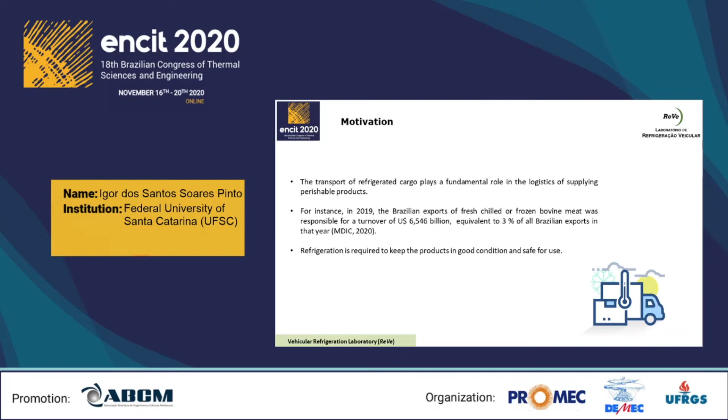The transport of refrigerated cargo plays a fundamental role in the supply of perishable food, allowing the maintenance of these products in good condition and safe for consumption until their arrival at their destination. In 2019, Brazilian exports of chilled and frozen bovine meat were responsible for a turnover of $6.5 billion, equivalent to 3% of the national exports. Through this information, we can note the great demand and the importance of transporting perishable cargo in the country.

Some papers address important topics related to refrigerated cargo transport. Tso et al. evaluated the effects of heat and mass transfer on the energy consumption of refrigerated trucks. The authors found that the use of air curtains can generate energy savings up to 40%. Da Silva, Silva e Taglialenha developed a steady-state mathematical model to evaluate the energy consumption required to transport refrigerated products, considering geometric and operation parameters.

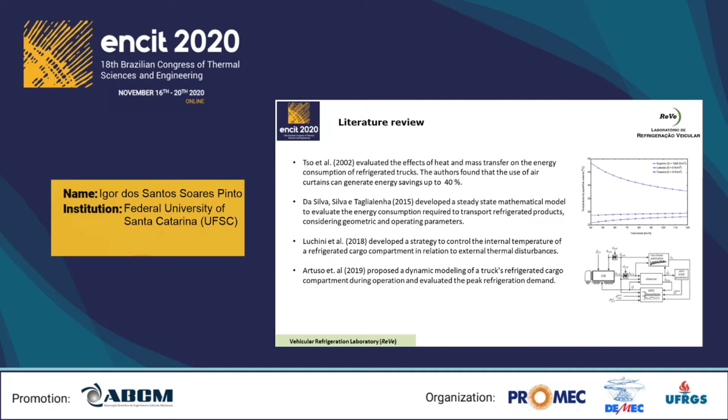Luchini et al. developed a strategy to control the internal temperature of a refrigerated cargo compartment in relation to external thermal disturbances. Artuso et al. proposed a dynamic modeling of a truck's refrigerated cargo compartment during operation and evaluation of the peak refrigeration demand.

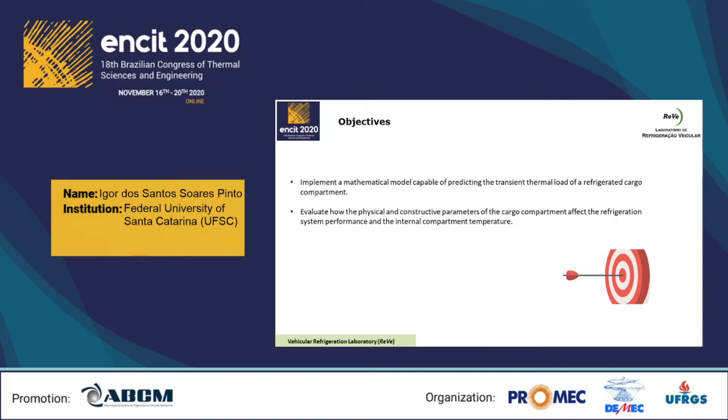This work has the following objectives: implement a mathematical model capable of predicting the transient thermal load of a refrigerated cargo compartment, and evaluate how the physical and constructive parameters of the cargo compartment affect the refrigeration system performance and the internal compartment temperature.

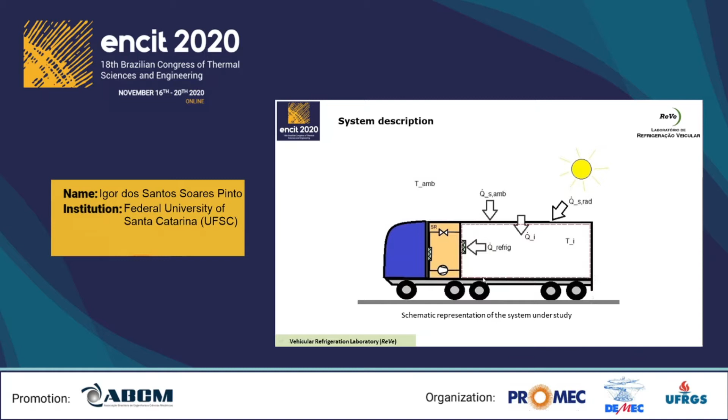A schematic of the studied system is shown in this image. In it, we have a truck equipped with a cargo compartment and a cooling system. The compartment interacts with two external heat sources defined as the thermal load due to the solar irradiation, Qs-rad, and the ambient thermal load, Qs-amb. While part of these parcels is accumulated on the compartment walls, the rest is infiltrated in its interior, this being Qi. In order to keep the internal temperature Ti within acceptable values, the infiltrated load must be removed by the refrigeration system, whose capacity is represented by Qi refrig.

The system was modeled based on the first law of thermodynamics and the fundamentals of heat transfer. Energy balances were applied on each face of the refrigerated compartment and in its interior. The solar position was considered, which continuously changed the thermal load Qs-rad along the path of the vehicle. The two main equations of the model are the following.

The first represents the derivative of the internal temperature with respect to time, which is equal to the infiltrated thermal load minus the cooling capacity, Qi refrig, divided by the sum of thermal capacities of the internal air and the products inside the compartment. The second equation is related to the derivative of the surface temperatures with respect to time, which is equal to Qs-rad, the thermal load due to the solar irradiation, plus Qs-amb, the ambient thermal load, minus the infiltrated thermal load, Qi, divided by MSCS, the thermal capacity of each surface element. Additional equations were used to evaluate this derivative.

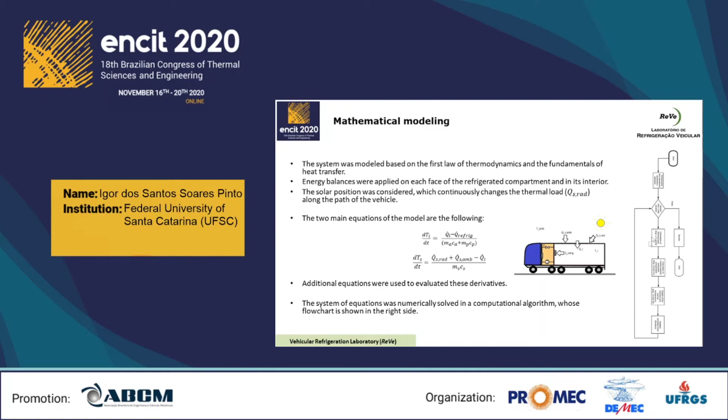The system of equations was numerically solved in a computational algorithm whose flowchart is shown on the right side of this image. The physical and constructive parameters investigated in this study were the following. In the table on the left, we can see the external dimensions of the compartment, and in the table on the right, the insulation thickness cases considered in this study. We have used 4 insulation thicknesses with the values of 50, 80, 100 and 120 millimeters.

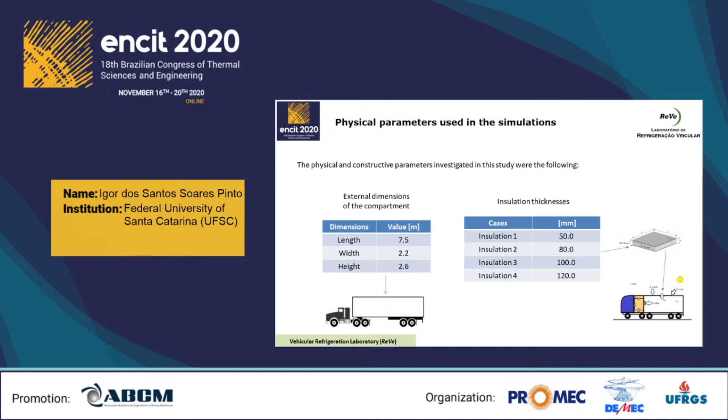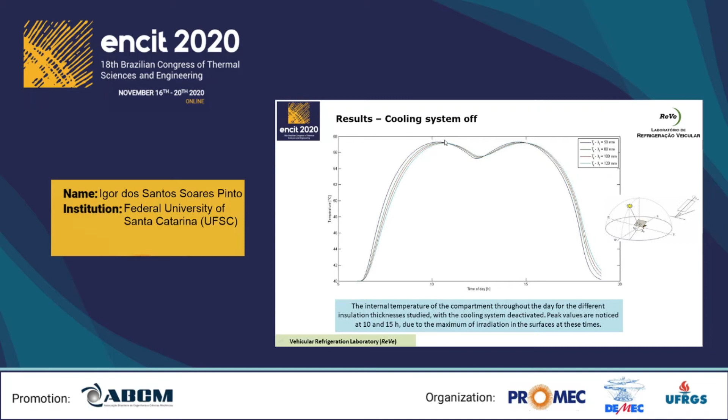The first result obtained was this graph. It shows the internal temperature of the compartment throughout the day for the different insulation thicknesses studied, with the cooling system deactivated. We can see the time of day in hours on the horizontal axis, and on the vertical axis the temperature in degrees Celsius. We can observe peak temperatures of approximately 57 degrees at 10 a.m. and 3 p.m. due to the maximum irradiation on the surface at these times. Another result obtained was this graph.

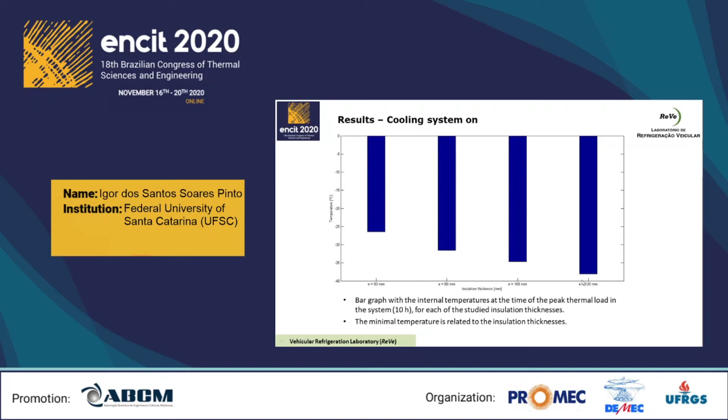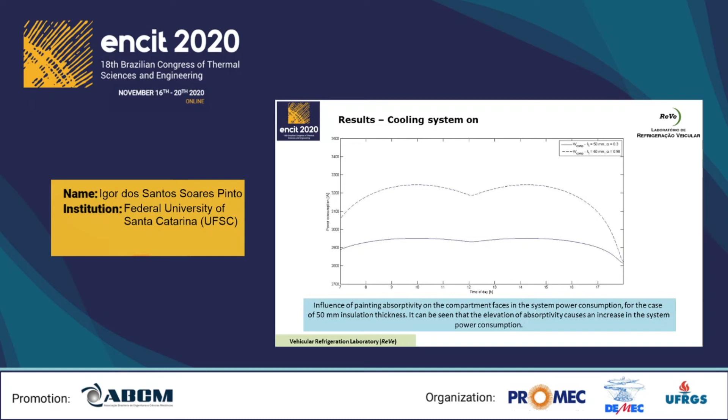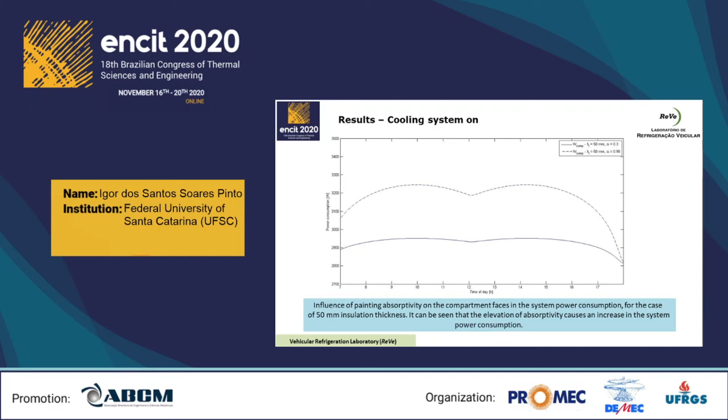This figure shows the influence of painting absorptivity on the compartment faces in the system power consumption for the case of 50 mm insulation thickness. It can be seen that the elevation of absorptivity causes an increase in the system power consumption. We can observe in this graph that in the horizontal axis we have the time of day in hours, and in the vertical axis is represented the power consumption in watts. As can be seen for the insulation thickness of 50 mm, the painting absorptivity change from 0.3 to 0.98 results in an increase in the maximum values of power consumption from 3000 watts to 3250 watts. This represents an increase of 8% on the power consumption.

Here in this slide we can see two tables. The first table shows the fuel consumption for the cases of insulation thicknesses of 100 and 120 millimeters. In this case, it's noticed that the increase of the thermal insulation thickness from 100 to 120 millimeters reduces the fuel consumption by 45%. The second table shows the fuel consumption for the values of absorptivity of 0.3 and 0.98 and the insulation thickness of 50 millimeters. As can be seen, the change of the painting absorptivity from 0.3 to 0.98 results in an increase of 1 liter of diesel. That represents a difference of 8% for this case. It can be seen that both parameters affect the system fuel consumption. However, it's also noticed that the insulation thickness has a larger effect than the absorptivity on the fuel consumption.

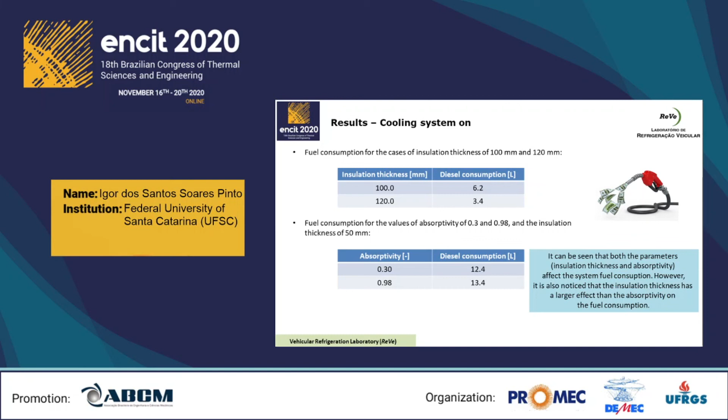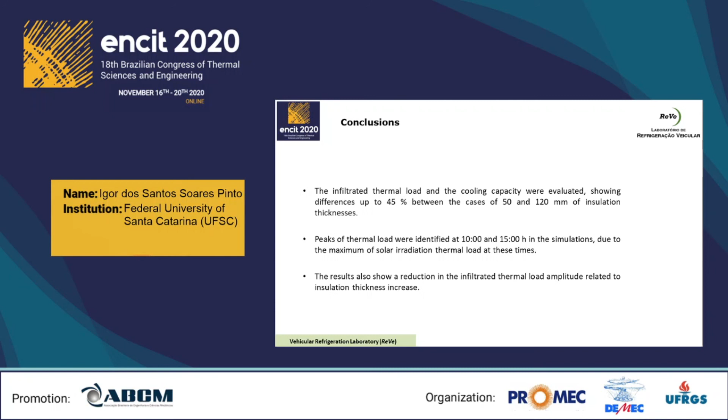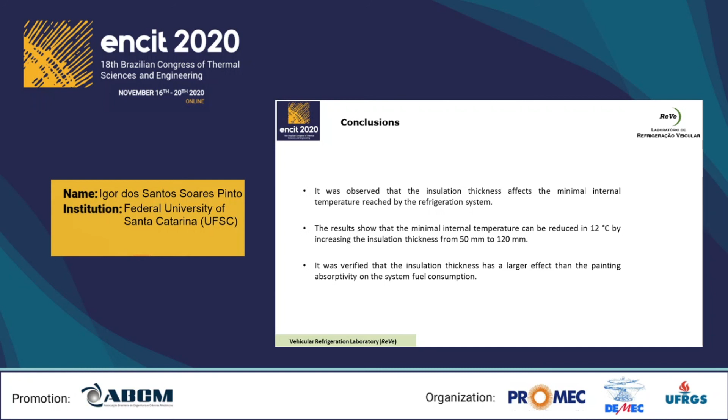We have the following conclusions for this work. The infiltrated thermal load and the cooling capacity were evaluated, showing differences up to 45% between the cases of 50 and 120 mm of insulation thickness. Peaks of thermal load were identified at 10 am and 3 pm in the simulations, due to the maximum of solar irradiation thermal load at these times. The results also show a reduction in the infiltrated thermal load amplitude related to the insulation thickness increase. It was observed that the insulation thickness affects the minimal internal temperature reached by the refrigeration system. The results show that the minimal internal temperature can be reduced by 12 degrees Celsius by increasing the insulation thickness from 50 mm to 120 mm. It was verified that the insulation thickness has a larger effect than the painting absorptivity on the system fuel consumption.